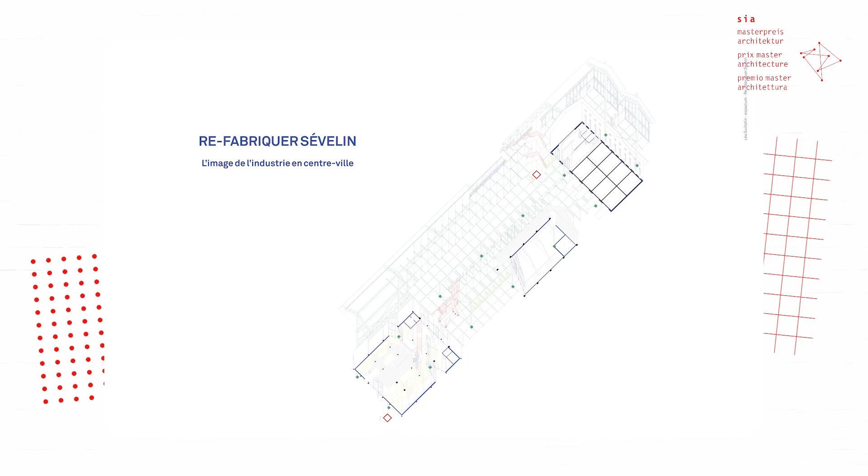This work extends the theoretical framework I developed in my previous research on industrial architecture in Switzerland. For this master project, my research focused on the place of industry in the city as a response to the growing pressure of ecological, ethical, and logistical challenges. These challenges invite us to rethink traditional production models segregated by zoning.

This project takes place in Sévelin, a district in Lausanne, on the former productive site occupied by Good Company until 2016, one of the last industrial sites in the city center from the 1930s. In line with the Flon district, the Sévelin district is becoming more tertiary, erasing its productive past, and the remaining productive buildings are now facing strong real estate pressure due to their location.

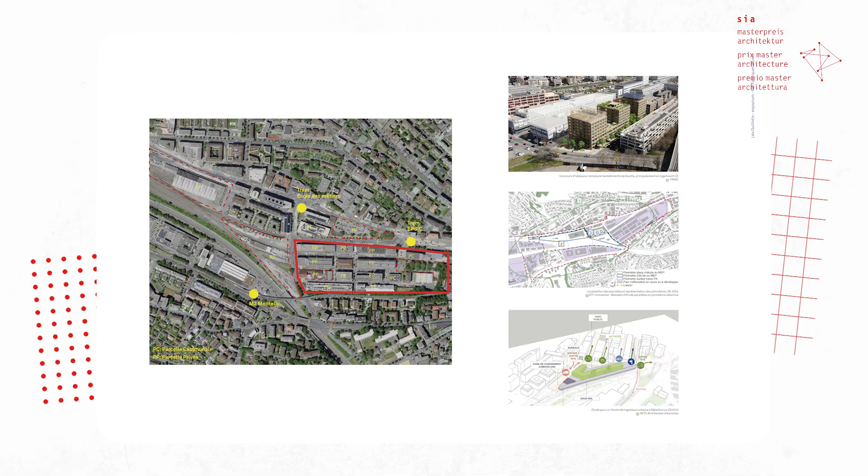The project proposes an alternative to enhance the site and strengthen its productive, social, and cultural character through a center for recycling building material destined for demolition. The center would collect, sort, store, and repair construction materials. It would also raise public awareness through a showroom, events, and training, welcoming architects, engineers, craftspeople, and residents of Lausanne and the surrounding area.

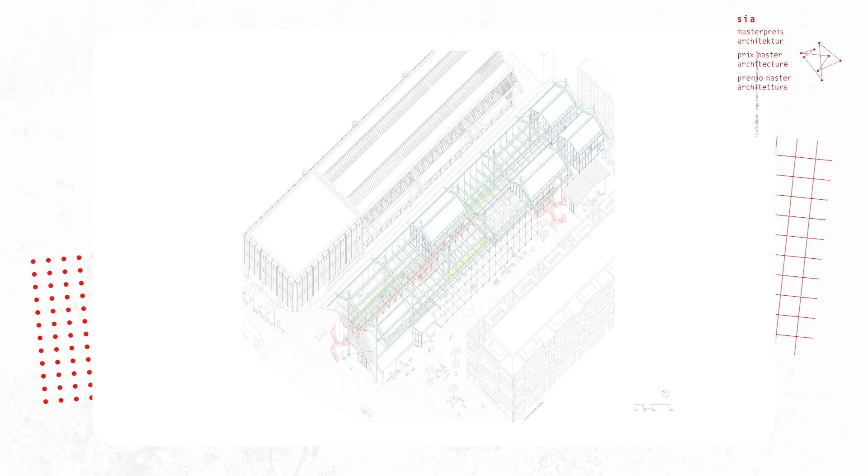In a few words, the architectural intervention consists of installing a large modular shelf capable of integrating the existing structure and dialoguing with the productive history of the site. This result came from long research to fit the site and the neighborhood.

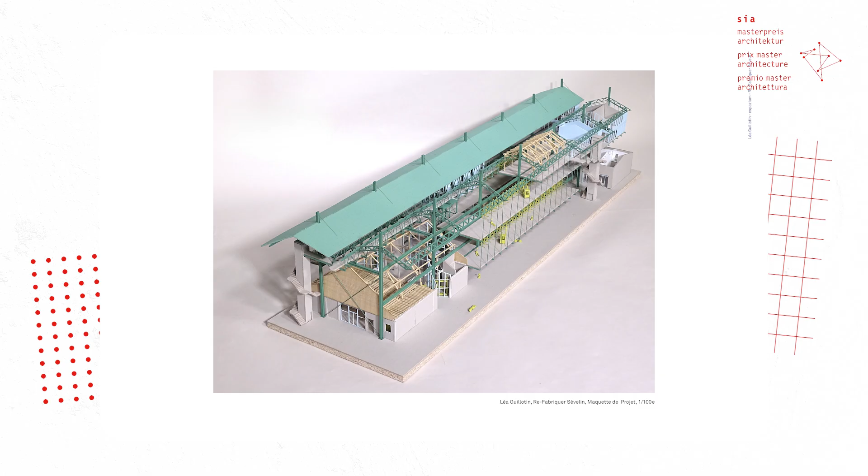I first thought the building according to the classic diagram of an efficient factory with a load-bearing facade to free up the floor plan. But the thinking evolved toward a solution that avoided the monolithic block logic already very present in Sévelin. On the contrary, the aim was to propose a building that would preserve a certain porosity, as it was until now, while ensuring functional density.

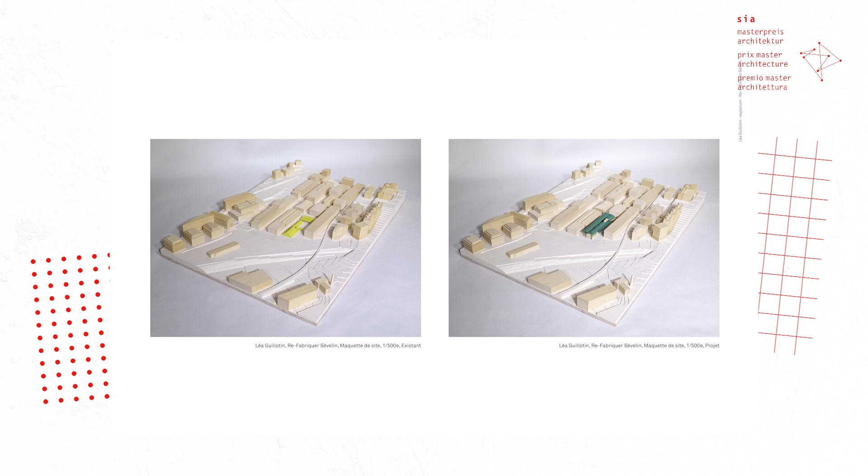Through its two sides, the roof contrasts the rigidity of the site and at the same time dialogues with the building to the north. Furthermore, the configuration presents thermal and economic advantages. Storage does not necessarily require heated space and therefore a facade, so by removing the facade, savings are achieved in terms of cost and carbon footprint.

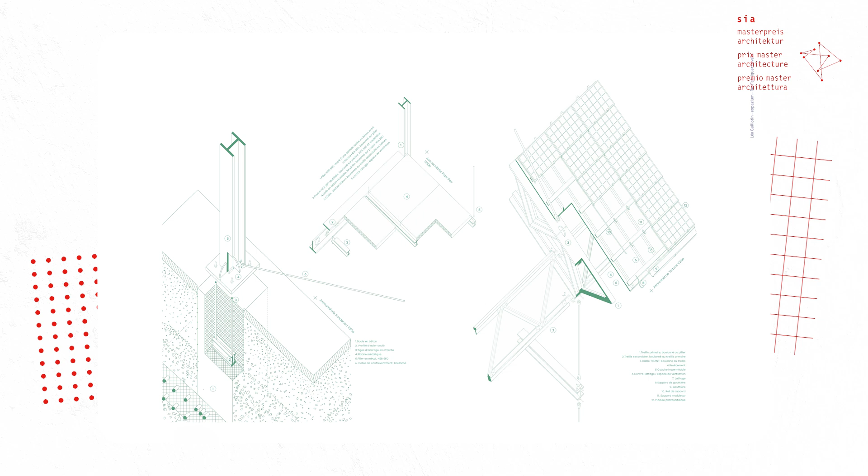The metal structure of the shelf is designed with as much reuse of elements as possible, such as slabs, medium span beams, and trusses. Most of the existing building will be preserved.

So concretely, the reuse center is organized through three existing halls. The first will become a public space hosting a showroom with stored materials, marking the beginning of the reuse awareness trail that unfolds through the storage area. The central hall would host a workshop for the rehabilitation of materials, connected to the logistical flows.

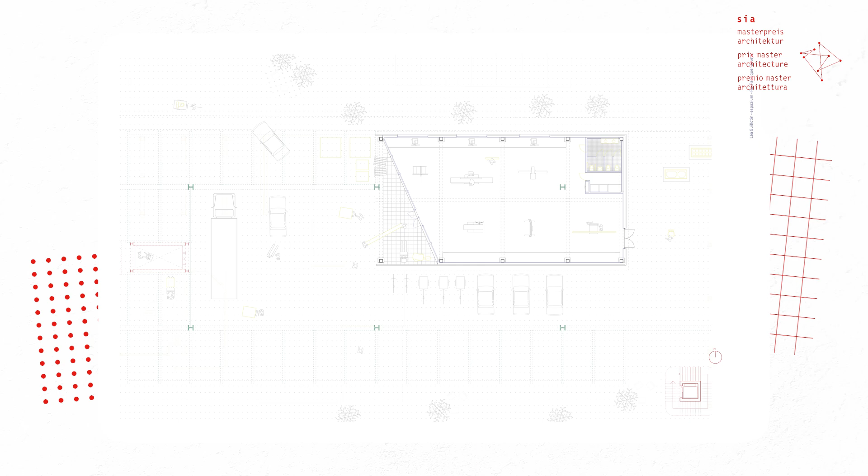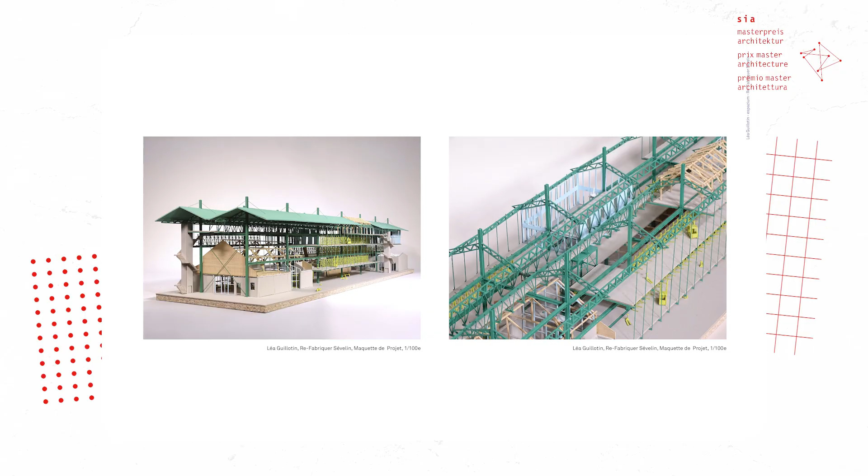This project is part of a desire to question the place of industry in the city today, not as a simple vestige of the past, but as a potential lever for urban, social, and economic transformation.